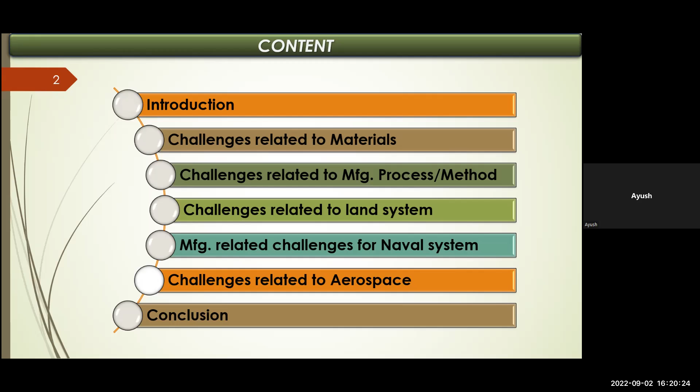So the Indian defense sector is basically divided into these 5 parts: weapon engineering systems, flight systems which include missiles and aerospace, land systems, marine equipment, and electronic and military communications. I'll only be touching on weapon systems, flight systems, land systems, and marine systems. Communication systems I won't be touching on, but it's also one of the pillars on which the Indian defense and aerospace sector is standing.

In weapon systems, small arms are included. Missiles and jet engines you are aware of. In land systems, tanks and launchers are included. In marine equipment, warships and submarines are there. So these kinds of things are there in the portfolio.

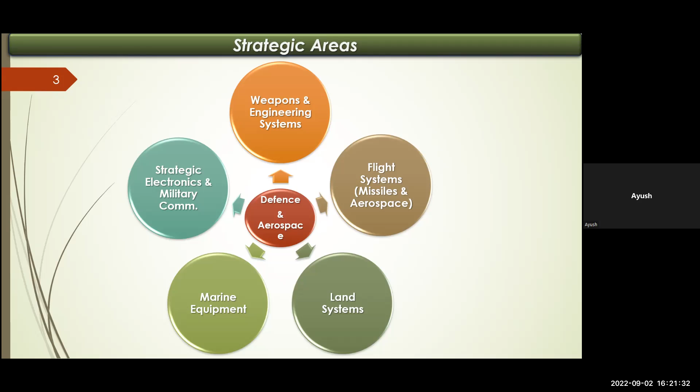So when we talk about defense, what is the end requirement of my customer? My end customers are either from Navy, Army, or Air Force. Or sometimes the requirement comes that the same system has to be given to the Indian Army as well as the Indian Navy. So a wide range of applications are there.

Like this system you can see, this is a modular bridge kind of thing. If there is a small lake, or a small road not available for commuting, how will your strategic weapons move into the other territory, from place A to place B? It won't be possible. So such products are there, needing to be deployed on land as well as maybe in an area where water is there. So you can understand the kind of pain that goes into designing it—marine application also needs to work. Then there are diversifications.

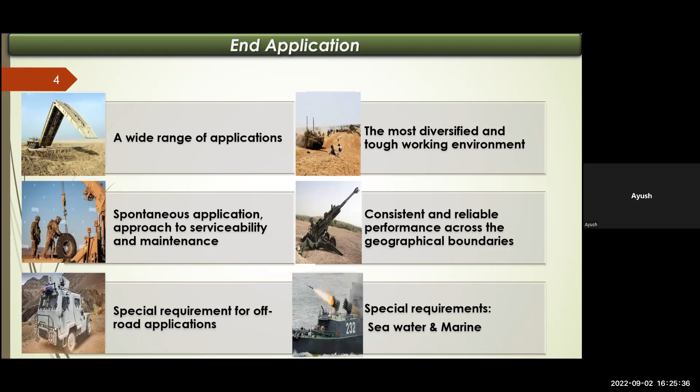And then comes seawater and marine conditions. So corrosion resistance, anti-fouling, these kinds of things become of prime importance. These are the things which the end user wants us to take care of - all such issues - and that is of prime importance.

So, talking about the technologies which we work with these days, I could divide them into three parts. One is nascent, being built, which has not matured and still has scope for improvement. And the third is already matured, where there is some development going on, but fairly we have reached the level wherein our end users are happy with the kind of systems we are delivering as of now.

So one thing which is still nascent is advanced materials and optronics. Ballistics radar systems are available, but there is a lot of scope for improvement. Advanced processing, hydrodynamics, use of AI - this is still not there in the Indian defense industry to a greater extent. There might be a small pilot project, but not to a great extent.

Then fairly mature are composite control systems, ruggedization structures, servo drives, navigation systems, and networks. Navigation systems, because of ISRO, a lot of good things have come up for Indian defense.

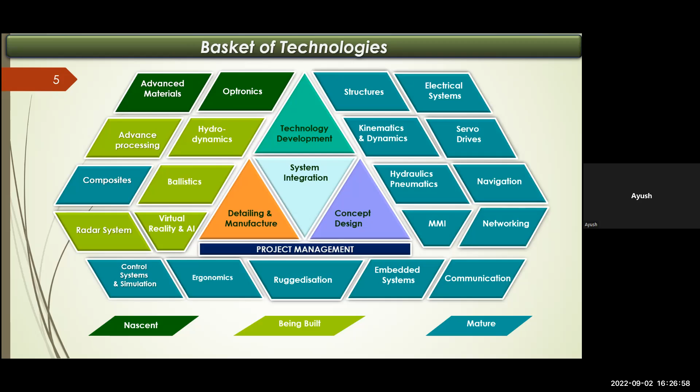So any development which happens follows this cycle. What is the mission statement, or the end requirement of my end customer? On that basis, a problem statement or mission statement is defined. Over that mission statement, we develop a concept model, or concept development happens. From concept development, the system level design happens. From there, a detailed engineering drawing is developed, and then a prototype is developed.

It does not happen that you make a model and directly start producing - you cannot directly bulk produce, like what happens in the automobile sector or most other sectors. In the defense sector, you need to make a prototype, prove it, and proving may take 7, 8, 10 years. From my experience, I have seen a few systems now in serial production, but the initial development happened in the year 2000 or even before. Some systems were developed in the 1980s or 1990s that are now in serial production. So such a long cycle is there.

One system I'm particularly aware of, we've been testing for the last 5 to 6 years. Such rigorous testing is happening because of the reliability requirement. It has to fire when required; else, the system should remain idle and not be in use. But when you click a button, it should do the required purpose.

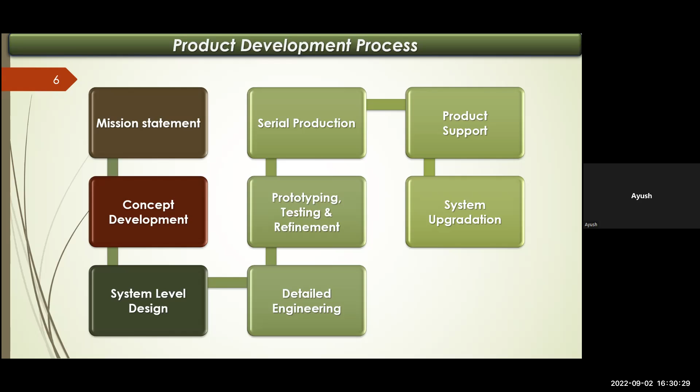So what all materials are required? We deal with metals, ceramics, polymers, and composites. Mostly we deal with metals—I would say 90% of the bandwidth or consumption is metals. Composites are next at 5 to 7%, then the rest is ceramics and polymer. That's the typical bifurcation as of now in defense.

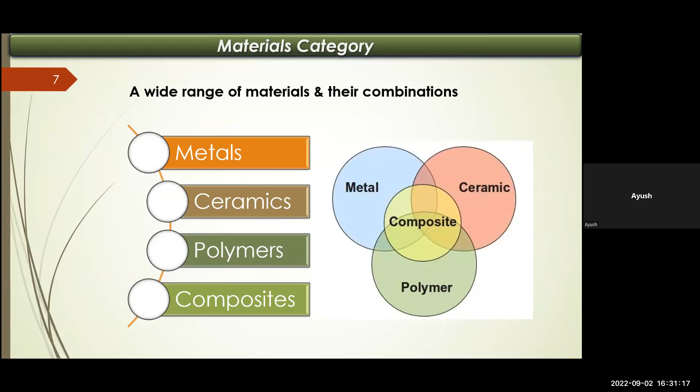Composites and polymers are mainly used in aerospace, and for naval applications and other things, metals and ceramics are used. Ceramics especially are used wherein high temperature applications are required.

When you design, or when the end user gives you their expectation, based on that you need to select a material. Once you've selected that, you have to go with metals. In metals, people take care of mechanical and physical properties only, but special care needs to be given for chemical properties as well as manufacturability. Sometimes we've seen cases wherein bimetallic corrosion happened in the system and the systems failed—those kinds of things need to be looked into. So strength, ductility, toughness, hardness, strength-to-weight ratio are of prime importance. Physical properties also play an important role, but chemical properties and manufacturability are most important.

Sometimes, if my requirement is ballistic properties or typically very high strength, as soon as I increase the strength, my machinability goes out, formability goes out, weldability suffers—we don't have welding consumables which can give such high strength. So far, I am only aware of a maximum strength achievable by welding of the order of 1100 MPa, not more than that. But most systems being used require a strength of 1700 MPa, 1600 MPa, or more. So these things need to be kept in mind when selecting a material, which most of us don't do. The systems may work fine for 2-3 years, but after that degradation starts.

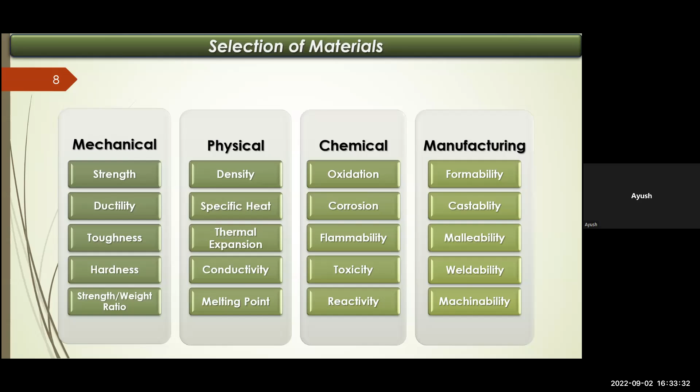These are some combinations or materials typically used in the defense sector. In special steels, we work with high strength low alloy steel 690 QL, 960 QL material—these have a strength of 690 YS and 960 YS. Then for marine applications, DMR 249A, AB2 material, NVF 690. And other special steels required include 15 CDV6. Armor grade steels are extensively used for tanks and many other applications. Most vehicles used by the army should be made up of armor steel or composite products for ballistic application.

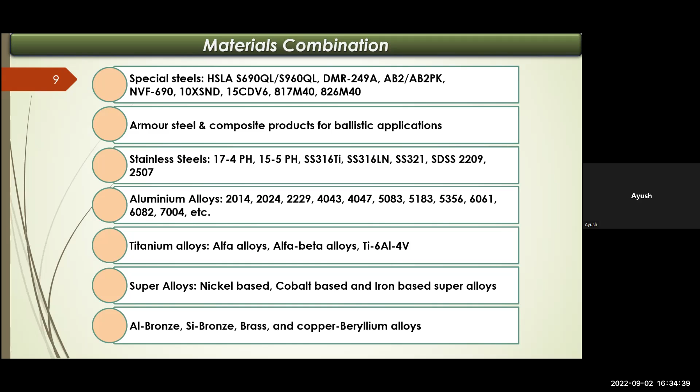For corrosion resistance in naval applications, we either go with aluminum or stainless steel because we don't have any other option. So SS, or 15-5 PH, or 17-4 PH, or sometimes duplex steel, depending upon what kind of application we are going for.

These are the grades of aluminum we have worked with so far. One particular grade of material which is extremely close to my heart is 7004. Before that, like 6000 series, 5000, 4000 series, they don't give the required strength which we aim to reduce the total weight of the system, strength to weight ratio. 7000 series gives the highest strength, but the problem with 7000 series is it's not weldable. It's not easy to weld.

A lot of problems people face while joining these materials. And at L&T, we had welded a lot of materials from 7000 series. Not only conventional welding like TIG, MIG, but we have gone into friction welding as well as laser welding.

Some other special materials which these days we are mostly using are titanium and super alloys for high temperature applications like jet engines, wherein the systems are going at a very high temperature, and at that temperature we need similar strength. So then we are going on nickel based systems, then aluminum bronze, silicon bronze. So these materials are also being used.

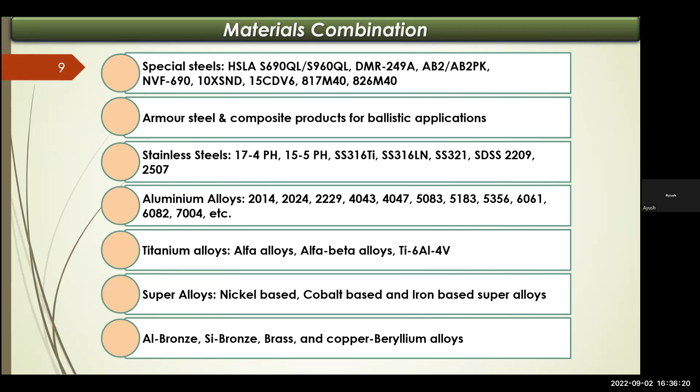So what are the problems when suppose we have selected one particular grade of material? Then again the problem comes: MOQ, minimum order quantity that is required. If I go to a company and want to buy 5 kg of material, literally they will kick me out of the company. Sir, we don't sell you 5 kg, you need to buy at least 5 ton or 50 ton. So sometimes that's the case.

So while designing a system, first thing is you need to see whether the functional requirement is getting fulfilled, and as well as with that, whether that material is available in India, or for that sake anywhere in the world, in whatever quantity you are manufacturing it.

Since it being a defense sector, the order quantity is very small. Maybe for 10 systems it is required, so it could be 5 tons only. Sometimes it becomes very difficult because the quality requirements are very stringent. You cannot accept a substandard material. A lot of cases had happened where systems failed because they had used a substandard product. Radiography requirement and NDT requirement are so stringent that even a small porosity sometimes is not acceptable.

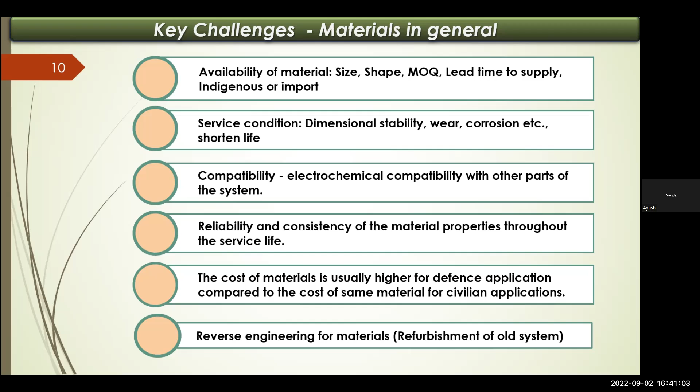And what the Ministry of Defense is asking is, can you refurbish those particular areas which had worn out or torn out. So there comes the reverse engineering of materials. Therein, we have to do reverse engineering and replace it with the adequate material. So that is a very gray area. Sometimes it becomes very difficult to identify what they have used and what we should use. And a lot of development is required in that particular region.

When we use such a vast variety of materials, different combinations of materials, we end up welding them together or joining them together.

I can still remember at one particular joint, I had to weld aluminium with steel. It was a horrible experience for me, because the joint configuration is such that I cannot use solid state welding. I have to use conventional welding process. So such challenges are there. Typically joint design and material thickness, we need to check when we are working with dissimilar materials.

Majorly different melting points and thermal expansions and contractions cause a lot of crack generation and other issues. Stresses on joints due to fixturing and constraints are there. Then different intermetallics are formed. So basically, when we are joining two materials, it becomes very hard.

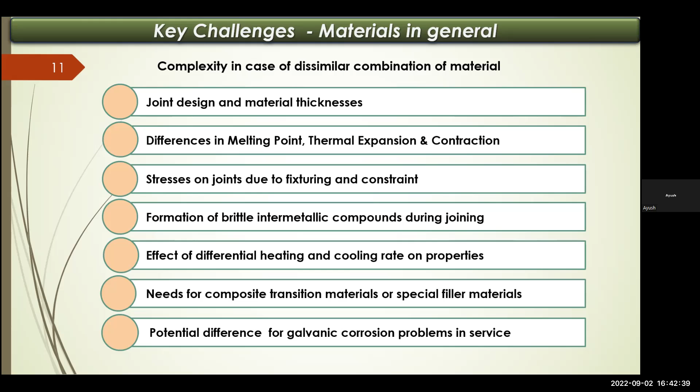So a lot of development or R&D we do, on how to join two different grades of materials. Whether a special filler needs to be made specifically for joining, we have also done that. We had made a special consumable which can be used for joining these two different grades. So these are the lists.

From here, what all points are missing in industry, wherein we are seriously struggling to develop, or we want some development to happen - these points I have listed down from this particular region, wherein most of the Indian defense sector requires your support or your collaboration.

Most of the systems, from design level, when we design a system, we keep it in mind that it will be made first time right, that no repair will happen. But that is not the fact. When manufacturing it, there are a number of times or iterations that had to be done, and many times we end up repairing the same joint twice or thrice.

But sometimes the end customer demands that only one or two repairs are allowed. Beyond that, the material is not usable for us - you have to throw away the material. So a lot of R&D, like we have also done some work on how many times a particular material can undergo repair, once, twice, thrice, and how the material degrades over a period of time, and when we do multiple repairs. That is a gray area wherein a lot of research can be done.

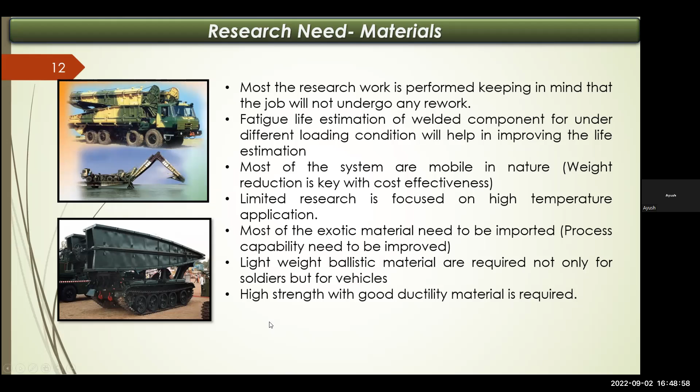Higher strength material is required to reduce the weight of the entire system. But that is again a problem - the higher the strength, the lower the ductility. So you can produce a material which shows 1100 MPa or 1500 MPa strength, but your ductility goes down. You won't be able to form it, bend it, or make the entire component out of it. It becomes very difficult. Maybe at a smaller scale it is okay, but when you have to build a system of 10 meters, 15 meters, 30 meters - some of these bridges are 46 meters long - then a lot of ingenuity and ductility is required.

Moving on, the challenges for manufacturing processes are that so far, most of the defense sector is reliant on only three processes: arc welding, that is SMAW, MIG welding, and TIG welding. So far, they are not comfortable with laser welding, friction stir welding, or laser cladding. These are beautiful processes with excellent properties - in fact, most of the automobile sector does most of its joints by laser welding. But so far, the Indian defense sector has not accepted these particular processes, because a lot of testing needs to be done.

Forging is one area wherein a lot of research is required. Whatever exotic materials I have mentioned in my previous slides, forging of those components is not easily available, at least in India. Another gray area for us, wherein I have particularly seen systems failing, is residual stresses.

When we do a lot of machining, bending and welding of aluminum structures, over a period of time residual stresses or SCC kind of thing - stress corrosion - that happens, and we have found cracks on the systems. So we still lack a lot of knowledge in that particular area.

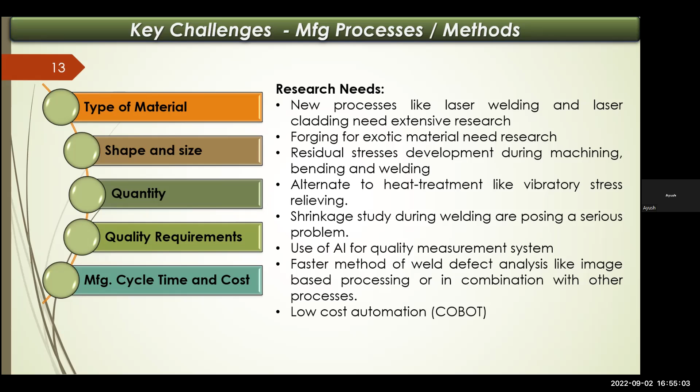So frequently cobots are used, collaborative robots, where the programming time has gone down, but the cost is still at least 5 times higher. If I can buy a robot for 5 lakh rupees, a cobot of the same size will cost 5 to 6 times more. So it becomes difficult to invest in such processes, where low cost automation would be a boon for the Indian industry.

In land systems, it needs to pass desert conditions, high altitude like Leh Ladakh (thanks to our neighbors), and coastal regions. Developing a system that can handle all three environments is very difficult, and the cost is extremely huge.

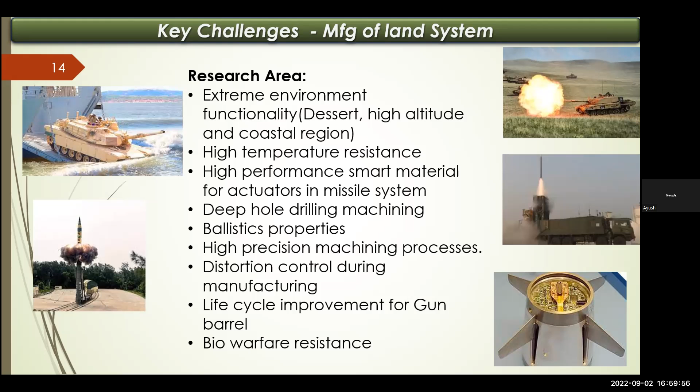The ministry will immediately accept and adapt such things. Some work is being done to improve the life by changing the material as well as doing cladding inside it. Bio warfare resistance is another area of development - tanks have filters and are designed so that a bio weapon will not work even if someone fires one at them, so people sitting inside the chamber stay safe. That is the intended purpose, and a lot of work is going on, with still scope for more.

Moving on to naval systems. Naval systems specifically work at sub-zero temperatures, so designing or selecting a lightweight material for sub-zero conditions becomes a challenge, which should also have good corrosion resistance. Fatigue life estimation at sub-zero levels has very limited work done. Weight reduction is another important area. For submarines or unmanned drones we are working on, we want development to happen in stealth materials.

So still we don't have such kind of capability, and a lot of scope of improvement is there. Fuel cell development - a lot of development is done by NMRL lab, Naval Material Research Laboratory, Ambernath, Mumbai, but still a lot of scope is there. A lot of efficiency improvement can be done.

When we talk about naval material, anti-fouling is the area which most of the shipping industry finds a pain area. A lot of maintenance they have to do just to avoid fouling, or to have the anti-fouling property. Every year, thousands and thousands, or crores of rupees, shipping industry puts in.

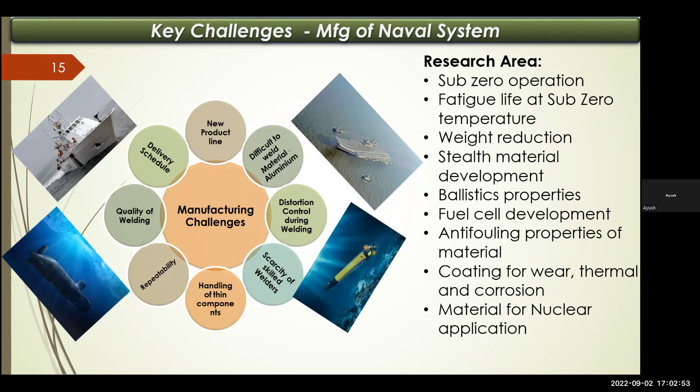Material for nuclear applications - people are exploring this. Even at L&T we are exploring it; we are part of few projects wherein nuclear capable submarines are being developed. So whatever small contribution is required, at whatever level, scientists all over India are doing it. One major problem that comes up is what material needs to be used, because when we talk about submarines, they have a very limited, very confined space. Making a nuclear reactor is one thing, but making a small submarine with those kind of capabilities is very difficult. So new materials are required with enhanced properties these days.

Moving on, aerospace is the last area, which I have intentionally selected because some work I have done during my PhD on it, and still a lot of improvement is required. Weight reduction is one - composites, a lot of metal matrix composites we are working on. So still a lot of improvement can be done.

Ceramic thermal barrier coatings are being used, and still, because we don't have those kind of capabilities for material at high temperature, these thermal barrier coatings and ceramics are required at a lot of places. To be frank, only a few key players in the industry can support these kinds of thermal barrier coatings - I can name them on my fingers. Such scope of improvement is required from industry as well as from academia.

Structural health monitoring systems are not at all available in India, and a lot of scope of improvement is there. Self-healing material is one thing most of us are talking about these days, and we seriously want to use such kind of materials for our applications.

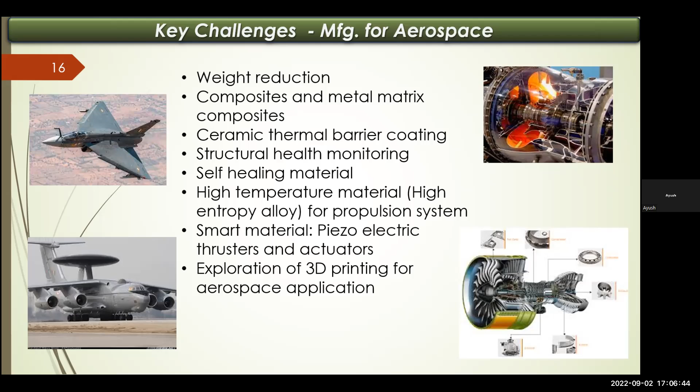So summing up, a lot of challenges and difficulties are there. These difficulties, whatever research areas I have specifically mentioned, are the challenges which the Indian defense sector is dealing with, wherein with a lot of research, a lot of you and enthusiastic students can help us come out of it and make us self-reliant. What is the motto as of now for the present Indian government? Atmanirbhar Bharat and Make in India.